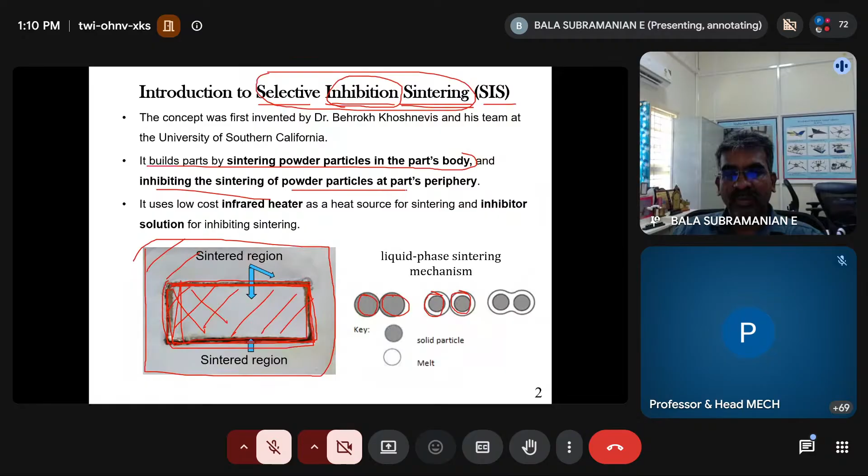We executed this particular process for a DRDO project, and many PhD students were involved in developing this system from scratch. So that is the aspect I'll be covering today. Hope you got what is selective inhibition sintering.

Do you have any questions now? You got what is selective inhibition sintering? Any responses? Have you understood? Do you have any questions? Because once we are clear with this simple definition, then only we will move on. So at least one response.

Thank you. So we did some simple experiments before we actually started our real work. These are some inhibitions which we have done. And we also applied the heat sources, so you can see the burning here, where we are able to see the sintering of powders and the inhibition behavior of the defined profile. Initially you can see the profile is not accurate because the inhibition was not good enough to make a proper profile. This was the first simple experiment we started.

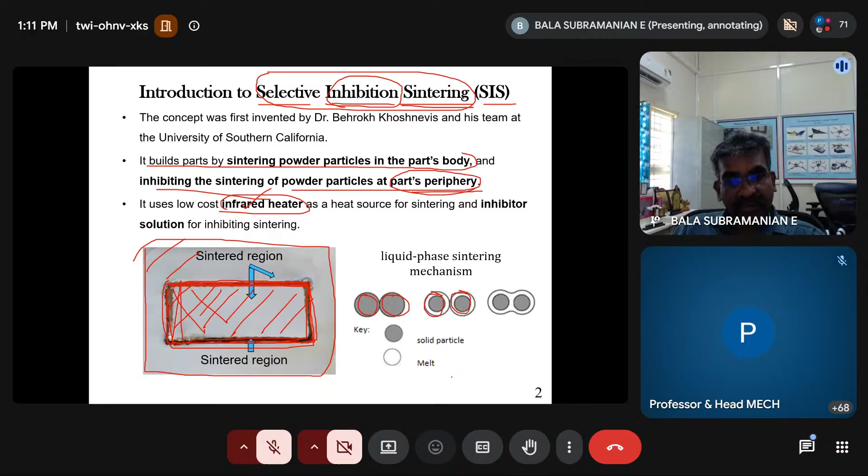So why do we want to go for this SIS process? We are avoiding the costly laser systems, and any indigenous polymer powders can be best utilized for sintering. Whatever polymer powder particles you are able to make, we are able to do the testing and make parts with polypropylene, high density polyethylene, low density polyethylene, polycarbonate, polystyrene; with these polymer powders, sintering can happen below the particular melting point.

Here, unlike FDM, we don't have any support structure. The support structure is not required, so we are able to remove the part from the surrounding material easily. With this process we are also able to achieve good accuracy, strength, and surface quality compared to other RP processes, other AM processes. So this is a simple schematic, the working principle of SIS.

So as many of them understood about the SLS, similarly here also we have the chambers. One is a feed chamber, which is moving up, and another one is build chamber, which is moving down as per the layer thickness. Okay. For example, I want to deposit the first layer, and then I will move for 0.5 mm layer thickness. This is my layer thickness. Then I will move the feed chamber to 0.5 mm, and the powders, whatever is coming up, will be pushed here, and that is being deposited on the top of this build chamber.

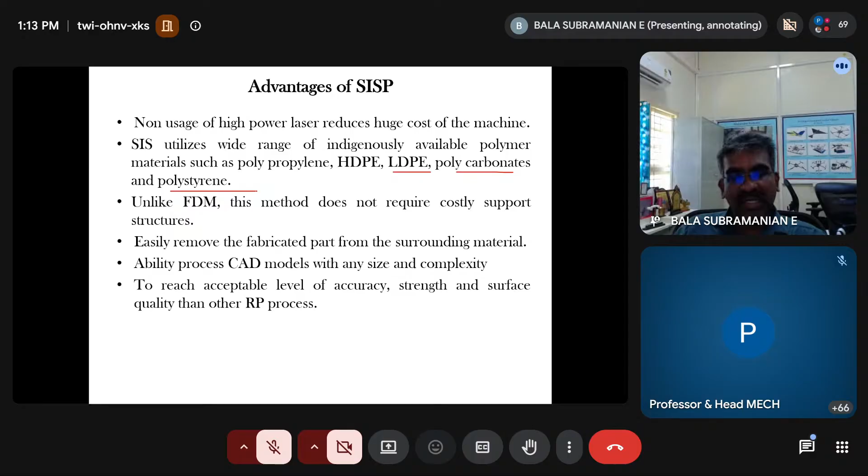And then your second step is the inhibitor will come, and it will define the part profile. Okay, so based upon the G codes, we are able to do this inhibition deposition. So from inhibition, the part periphery is being defined. And the third step is the infrared heater or ceramic heater or other thermal resources you are having as per your requirement with reference to the melting point of polymers, that will come into sintering, that is applying the heat sources, where the polymer powders are being joined. That is the third sequence.

So in this sequence, you are able to make each layer by layer. So it will come down and it will come up. Each layer, after printing, will be stored and finally it will be removed from this build chamber. The remaining powders are collected in this recycle chamber, similar to the SLS systems. Only thing, here we are using this inhibitor and some low cost heaters. So that is the basic difference between SLS and SIS. That is the fundamental working principle. Okay, so this is the working.

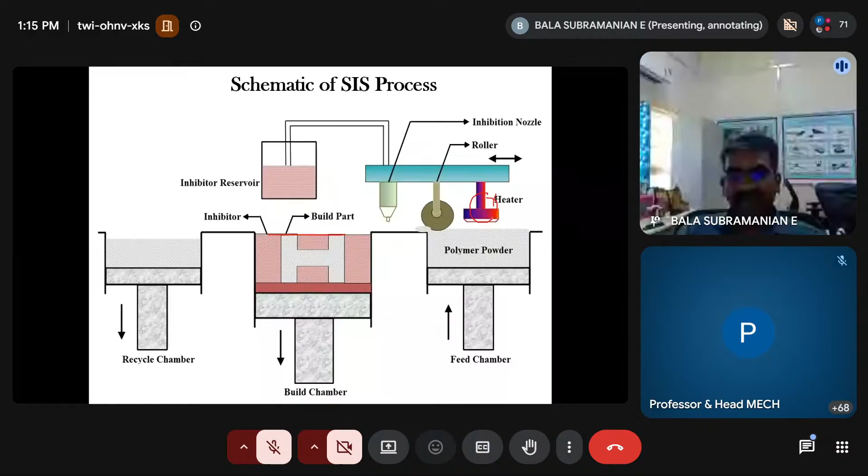So we could realize this with reference to some robotic based systems. Actually, the initial thought was how we could use some robotic based deposition for precise delivery and some Cartesian based motion for heating layer by layer. And then we realized some basic understanding from the XYZ Cartesian type of motion. These are all some basic conceptualization which we evolved during 2014-15. So finally, we were able to develop a complete system from the scratch. This is the completely indigenously developed system for our DRDO project.

So we have the control boards which will control XYZ and other extrusion motion. And there are some stepper motors and an extruder for extruding the inhibitor. Servo actuation for IR heater, limit switches are placed, and there are some temperature measurements with thermistors installed. So these are all mechatronic systems, mechanical and electronic, indigenously made at our lab. This work happened during my earlier tenure at Tech University, where Mr. Arvind was also working, and we were colleagues. Our JRF, MTech and PhD students were involved in developing this system from the scratch.

So this is the system. You can see the arrangements, how it looks. We have got the feed and build platform. This is a simple stepper motor, and there is a power screw which rotates, and this bed will move up and down. This is the powder deposition mechanism with a blade and roller pushing onto it. And this is a simple infrared heater which will heat the powder. And we have the inhibition mechanism, a very simple syringe-based mechanism pushed with a linear screw arrangement, with delivery through this nozzle.

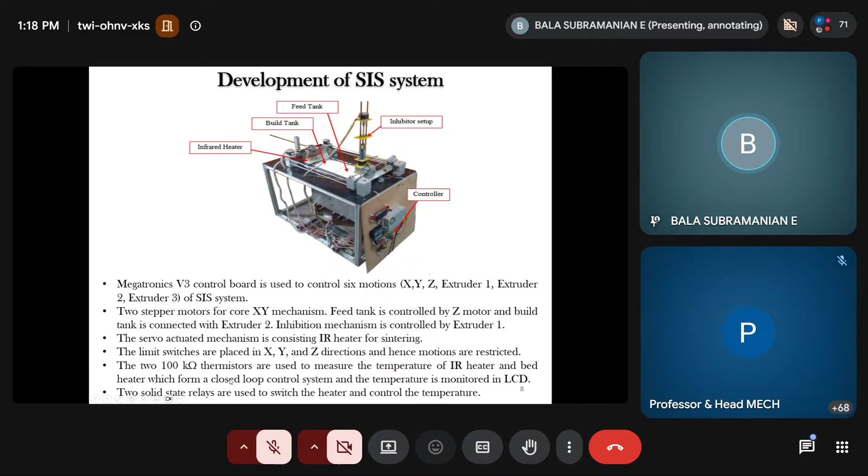So this is the specification of our developed system. For every 3D printer, we need to define the specification. Our 3D printing system is capable of a 200 mm cube part build volume. Layer thickness minimum is only 1 mm, because lesser than that, due to the penetration effect and other aspects, we were not able to do much because of the budget limitation. Our budget was not much to support a high-end system. It is not a low-end system, not a high-end system. It is an average system which we developed. So the layer thickness is possible.

Minimum is 1 mm, and the heater area of our heater, ceramic or infrared heater, which we used for many heater types, and the print feed rate, that is inhibition feed rate, is 1 to 3 mm per second, and we can hold up to 100 ml inhibited liquid. Okay, so powder feed rate, heater feed rate, nozzle diameter is 0.4 mm. Okay, so these are all some specifications which we arrived at of our SIS system.

So we have used these two softwares. One is Slic3r for tessellation. Everyone knows we need to do the tessellation, that is the STL conversion and slicing the layers, right? So that open source software Slic3r we have used, and then we need to control the entire system with the help of the Pronterface software, where inhibition and heater and bed axis and powder feeder, all these motions are being controlled using this software. So we have used these two softwares for our purpose.

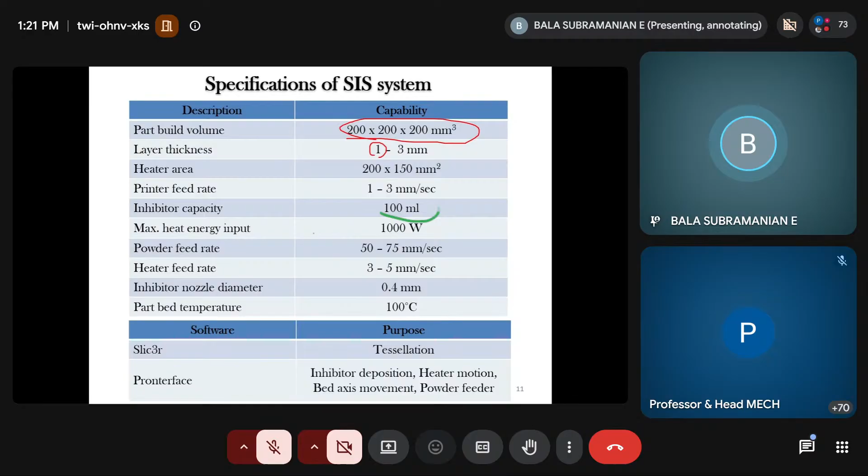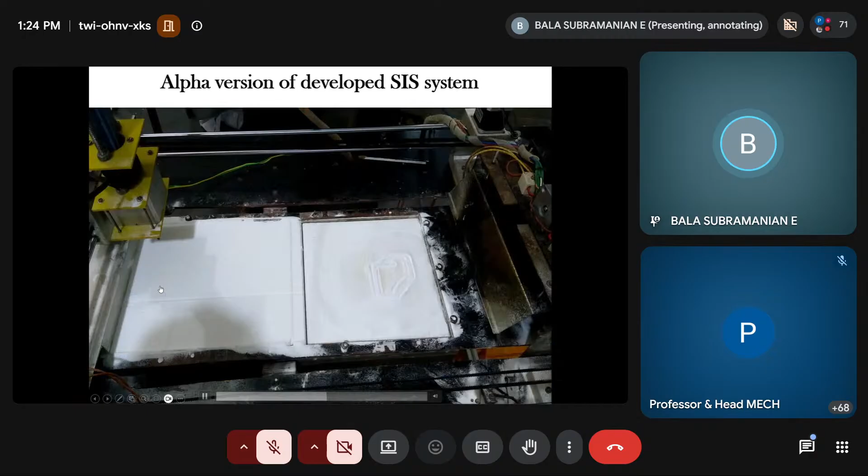So you can see some powder particles are burning out. I mean, the smoke is also coming out. Okay, so this is the reverse motion. Even in the reverse motion, you can switch on the heater. That also can be done. So there is a first layer which you can see is being sintered. Okay, so now the bed will move and deposit the powder. So that is the second layer, which will lay down the powder.

Okay, so once it is laid on top of it, now the inhibitor will come in to deliver this liquid to define the required periphery of the part. Okay, so then after that, the heater will sinter the powder particles. So this is the sequence in which, layer by layer, the parts are being sintered. The powder particles are being sintered. Okay, so this is how one can understand the basic working model. Okay, these are all very crude models. This is not a complete model. These are all basic educational models.

Okay, so whenever you develop any system in your institute or in your lab, you may have to use this kind of basic setup. You may not be able to buy high-end systems or high-end sensors. Okay, so you can use simple servo motors, simple screw mechanisms, simple boards, right? So that will give some idea how it works and how to control it. Okay, so whether we are able to do proper motions. So that is the work which you can think of.

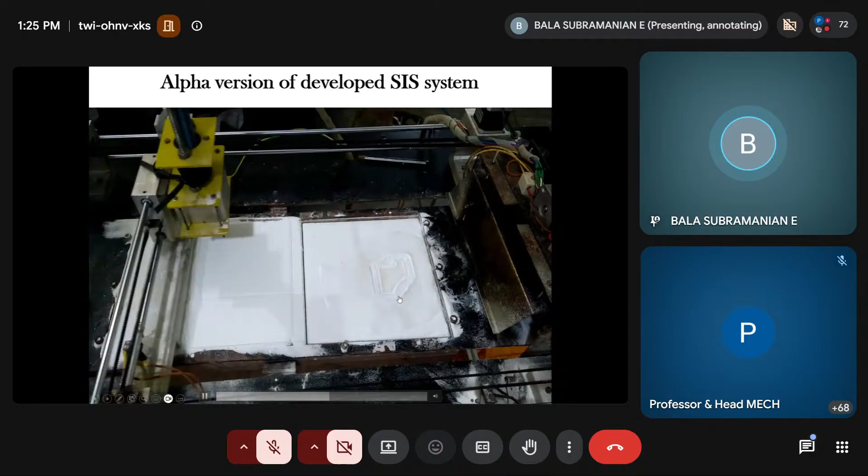Okay, and we are having this bed movement. You can see a small up-down movement very closely. So this is synchronized, and that is based upon the layer thickness. According to the layer thickness, the bed motion will be controlled. Okay. So these are all some observations which you can understand.

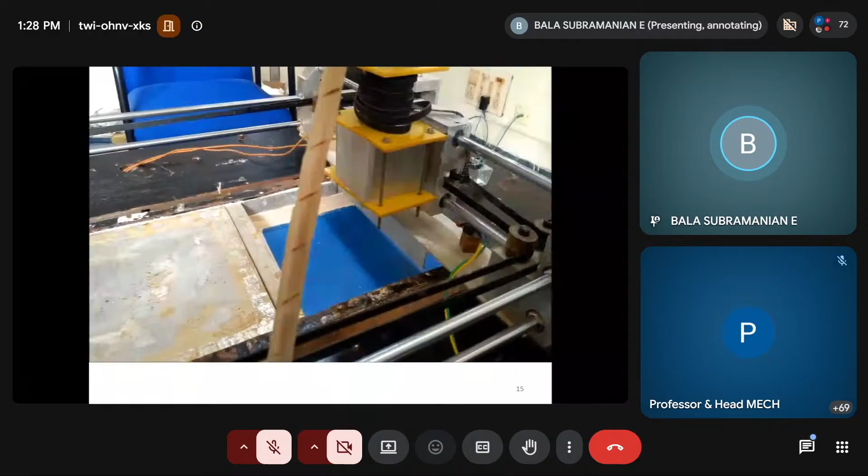So what I'm trying to say here is this is a completely from-scratch, low cost additive manufacturing system. Whatever the investment we had, it is very low cost, and we are able to make a simple new kind of system using these basic motions. Okay, so this is how the system works.

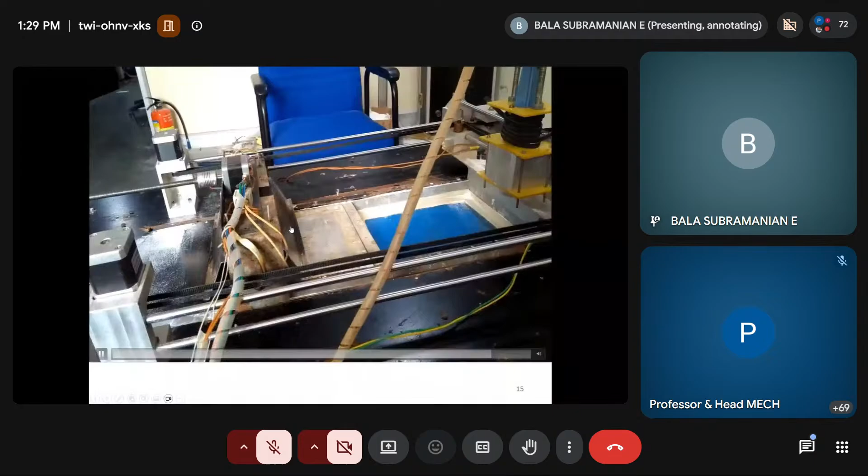Okay, so this is the heater movement, how the heater is moving slowly. Once it is turned on, it will be delivering thermal radiation on top of these powders, and that will be sintering the powder particles. Okay. So this is a simple example of how we have demonstrated. So till now, have you got any questions? Is it clear, the working principle and the functioning of the SIS system? Clear, yes, sir.

Hello, sir. You talked about the heat effect near that particle. Do you have any plan to reduce it? Because we are focusing on the periphery of the shape or design, but it is affecting nearby material, so I think it is not good. Also, you have not mentioned the nozzle material and temperature ranges. I think these were missing in your tables. If you know about it, please share it here, sir, because it will be helpful for designing.

Okay, so our nozzle diameter for inhibition was 0.4 mm. As for nozzle material, because we are only delivering a liquid, standard polymer material only we have used. Whatever conventional polymer based nozzles are available for FDM, that only was used. Okay, so the temperature ranges, sir?

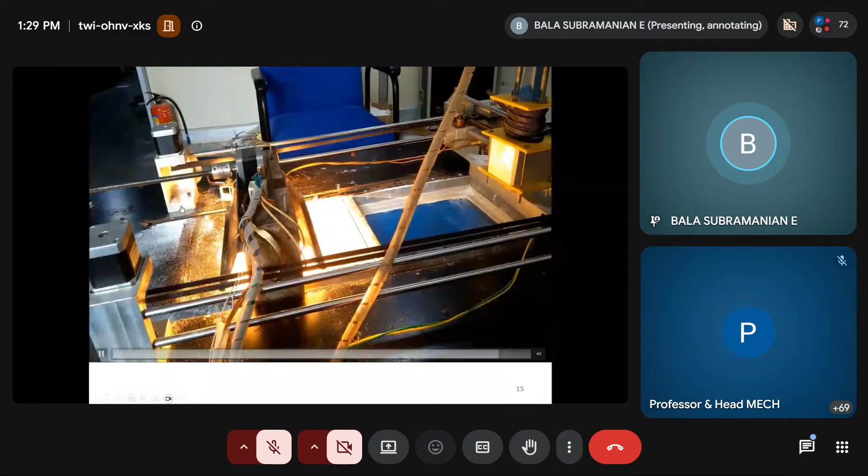Okay, due to the shortage of time, I'll just quickly go through. Initially, we wanted to understand the thermal structural behavior, which polymers to define for low temperature and high temperature applications. So we selected polymers like polypropylene, polycarbonate, polystyrene, ABS, HDPE, and LDPE. These are all polymers which are below a range of about 300 degrees C.

And we did thermogravimetric analysis and differential scanning calorimetric analysis to understand the melting point and the residual mass present after doing the sintering. So after doing the sintering, about 93.87 percentage mass remains during this particular process.

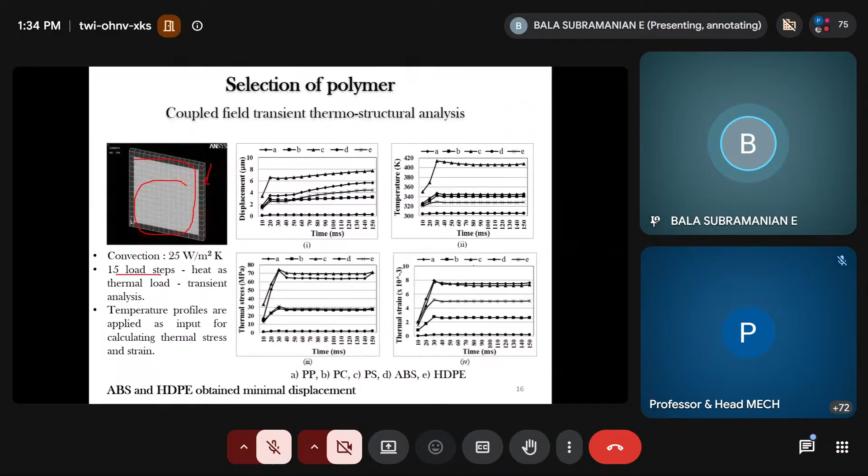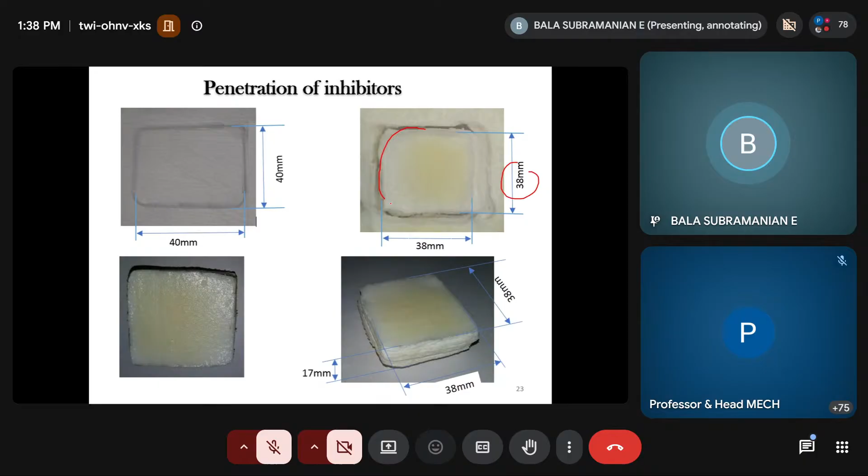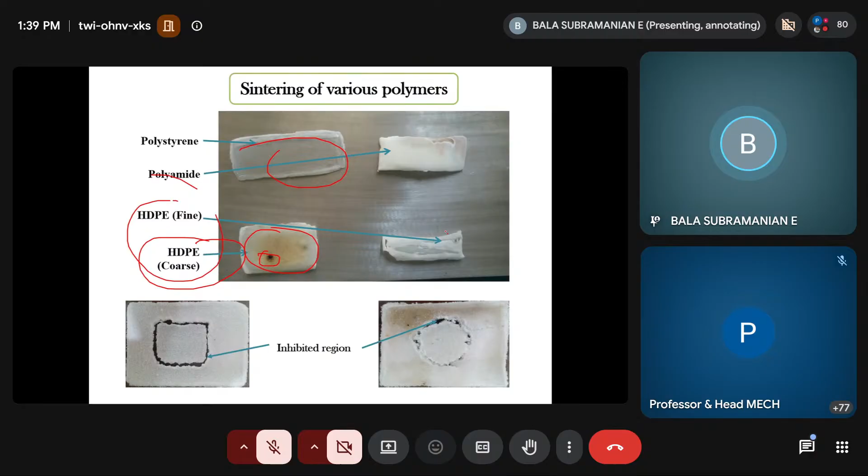That is what I said, the dispersion, how much it is being dispersed in this region. So this is the dispersion which was due to the isopropyl alcohol, control of isopropyl alcohol. So the inhibitor, how much it is being dispersed. So this is the simple measurement after sintering and inhibition. So we have got error about 2.81 mm in the width and 2.84 mm in the length side. So this is the problem with reference to the dimensional accuracy.

So how are we going to reduce it? So that was the challenge which we would like to address during our course of experiments. Okay, so that is what we decided to do, more experiments and more trials. And this is a first level understanding of little complex profiles, whether the inhibition is proper or not. So this is the little complex profile, and the inhibition is uniform.

And then we did some gear profiles, and that is also controlled. So we are able to do more iterations and more trials and more improvements with reference to control of the inhibition, defining the part periphery. So that is the observation here, which I would like to highlight. So finally, we have selected this combination. Potassium iodide is 138 gram for 100 ml of water. Among these inhibitors, this is being selected.

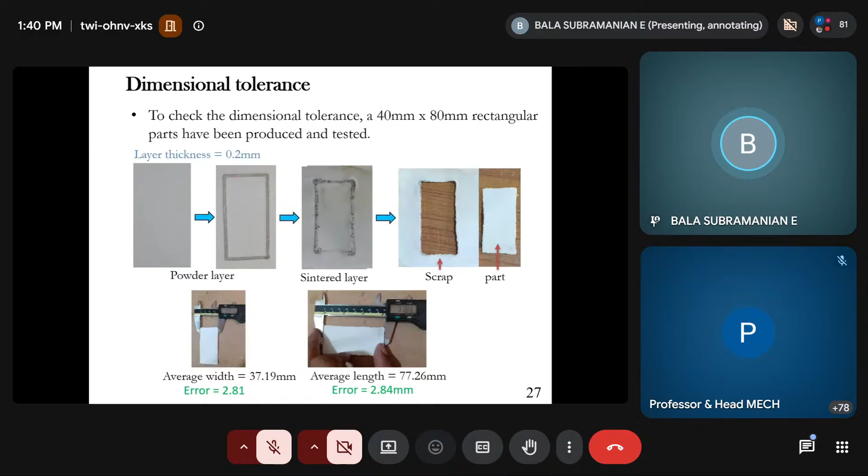For example, dimensional accuracy and mechanical strength may be one PhD thesis, dynamic mechanical analysis and wear rate maybe another PhD thesis, and fatigue another PhD thesis, with reference to optimization algorithms and intelligent modeling. So we have given the PhD students different aspects to work across, developing an understanding of all these characteristics. So in a quick way, we did the RSM and then ANOVA.

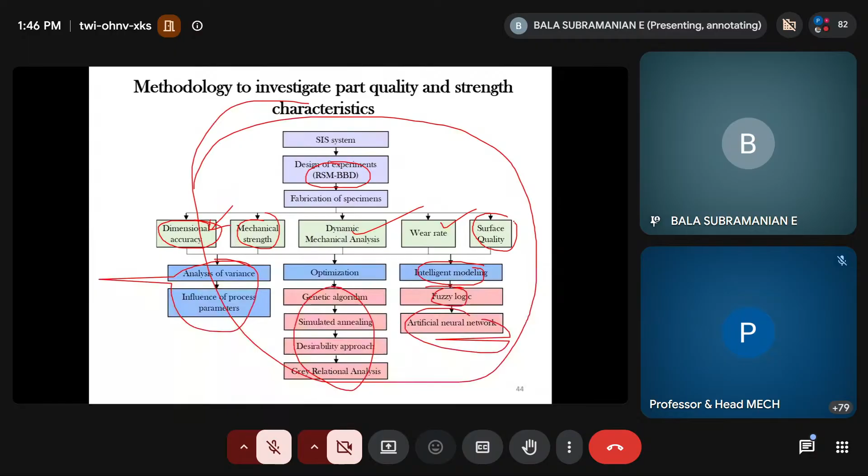So these are some RSM BBD design of experiments, and this is the ANOVA table, which is providing what are the most influential process parameters. In this case, it is D, and the coupling parameters A and C. So A is layer thickness, C is heater feed rate, D is printer feed rate. So here you could see the influencing process parameters, and you can understand the response surfaces based upon that, which ones are affecting the variables and their linkages.

Okay, so the conclusion here is build layer thickness 1 mm, heat energy 27.8 joule per mm squared, feed rate of heater about 3.39 mm per second, and printer feed rate about 120 mm per minute. We are able to get at least a good level of dimensional accuracy.

So we also did some fuzzy logic based intelligent modeling. Our input and output based upon the previous Box-Behnken design, we have evaluated these two informations. Based upon that, we have designed these membership functions, and fuzzy rules are formulated based upon the number of experiments which we have done, 29 experiments in the Box-Behnken design.

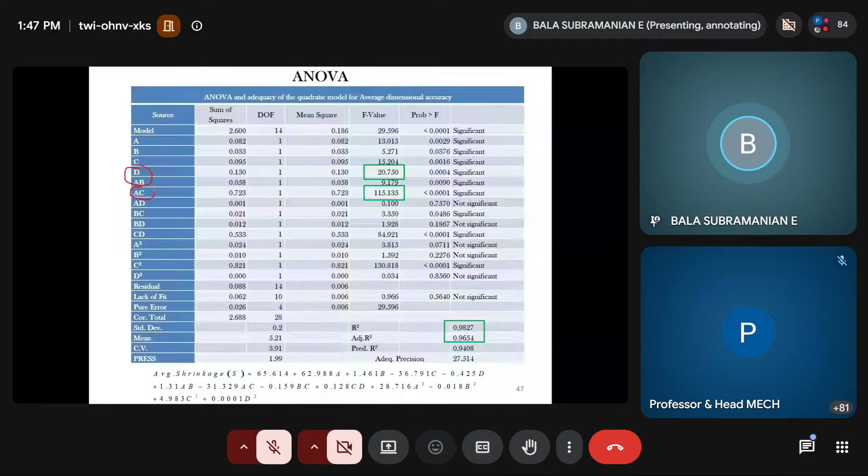And one of the PhD students also did fatigue analysis, and then he tested to replace the brackets. So this is the bracket. This bracket, again 3D printed with our system, is being replaced here, and it went for some cyclic loading.

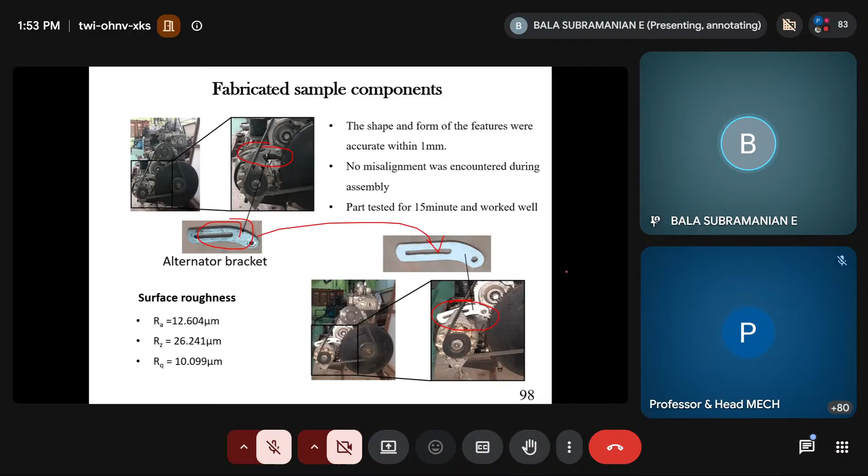So similarly, when you are doing some real-time testing with your 3D printed part to replace the existing part, then you can understand the functional aspect of the particular part and the strength characteristics of the part. So this is some of the basic level tests which we did with our earlier Vel Tech University and IC Engine Lab.

So whatever I mentioned as the polymer-based SIS process, now Professor Khoshnevis's team is developing a metal-based SIS process. It is very promising to go for metal, but it will be very tough to do that. So if you understand the approach, SLS, 3D, FDM, it will be bulk sintering. SIS will be without the use of lasers, but it is bulk sintering. So that is where we want to have some compromise.

What kind of printing technology for bulk sintering you can think of, then it will be only for the SIS process. So these are all some printed parts from Professor Khoshnevis and team. So this is our system.

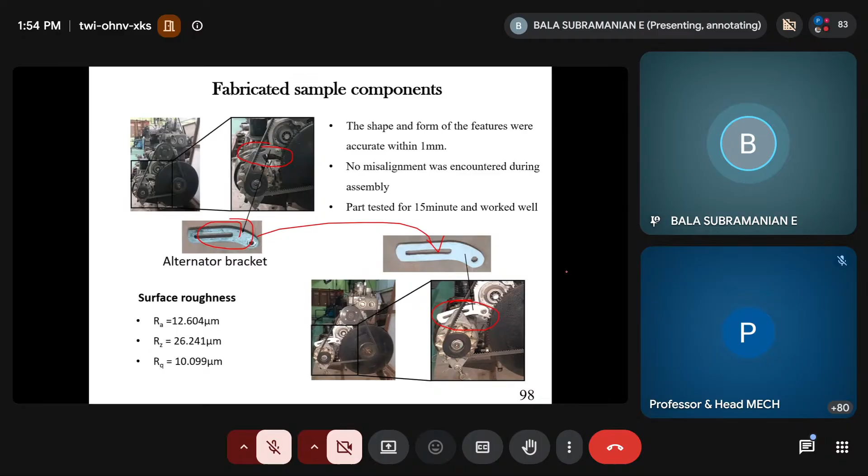When we worked during that time, there was so much of powders and so much of effort from our JRFs and other PhD students, and it was very complicated when we started our system from scratch. Whatever you see in the system, everything is designed indigenously and fabricated here inside our campus only. Only some of the parts we have given outside for final finishing and other aspects. Mostly we have used our in-house facilities.

Because of time, I want to complete it in 1 hour. So I just finished it because of the time Mr. Aravind has given to me.

So the SIS process, which is a new process, is not actually matured in India. Very few people actually worked on it, and from our end, we are the first in India to develop this system in a DRDO project. Still the system is not explored in India. So if you want to jump in, you can jump in, but you have to be very cautious on this particular part of product development. So that is from my end.

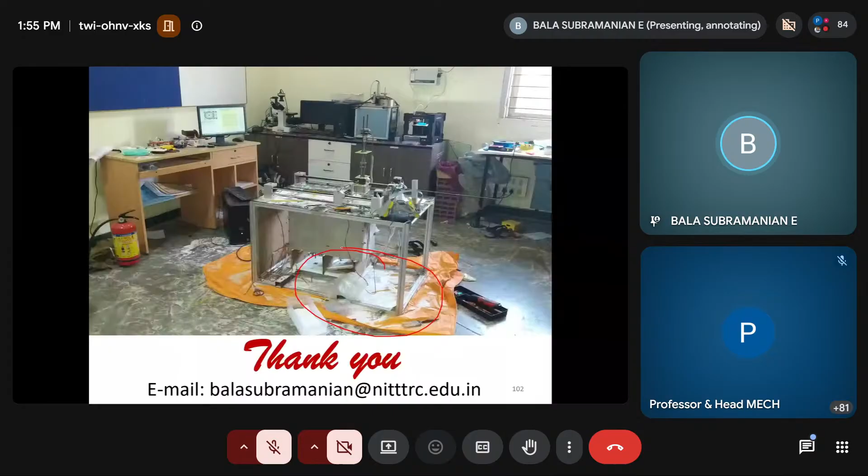Okay, sir. Because if it is smaller, then there will be a chance for good dimensional accuracy. In some cases, if we are increasing the part size, there will be variation in dimensional accuracy, like the surface roughness. I think one of your research scholars' results was around 10 micrometer in surface roughness, more than 10.